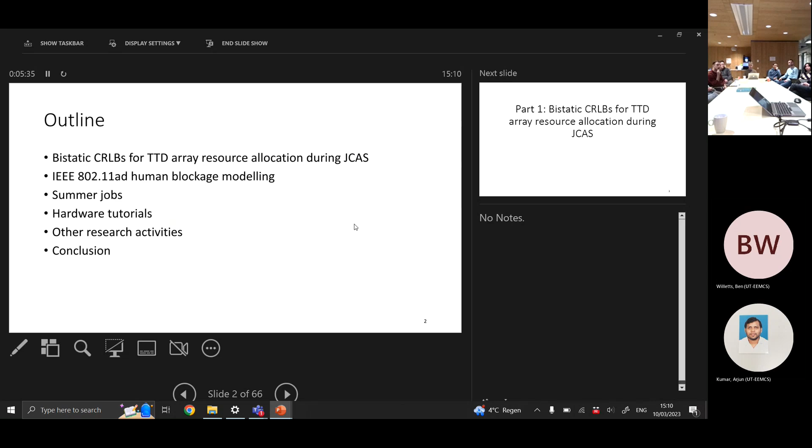So part 1: bistatic Cramér-Rao lower bounds for true time delay array resource allocation. That's a mouthful. For sensing, we say bistatic reflections. For comms people, you're looking at a CSI information matrix, and each signature within that CSI information matrix resulted from a bistatic reflection, other than the line of sight.

So me showing you how well you can estimate the time delay from a bistatic reflection, the phase, and the angle of arrival that is received, is equivalently saying how well can I get this signature, how fine a resolution can I get my signatures in your channel state information matrix. So there's an equivalence there, and I'll try not to make the terminology too radar-heavy, because I know the audience isn't radar-heavy.

So the JCAS problem here: we've got an extremely large number of elements at the access point, so it's base stations here. There's a 16 by 16 MIMO antenna system. And how much power does that system have to give to each of its users for them to get enough CSI information? That's the question.

Now we're going up into millimeter wave, almost in 5G. There's already established bands at around 29 gigahertz, which is almost millimeter wave. You're getting the capability to fit multiple antenna elements on user equipment, on smartphones. I've shown 2 examples of user equipment with antenna arrays, but the vast majority I've seen on IEEE Xplore are typically small multiband patch antennas on the small faces of the smartphone.

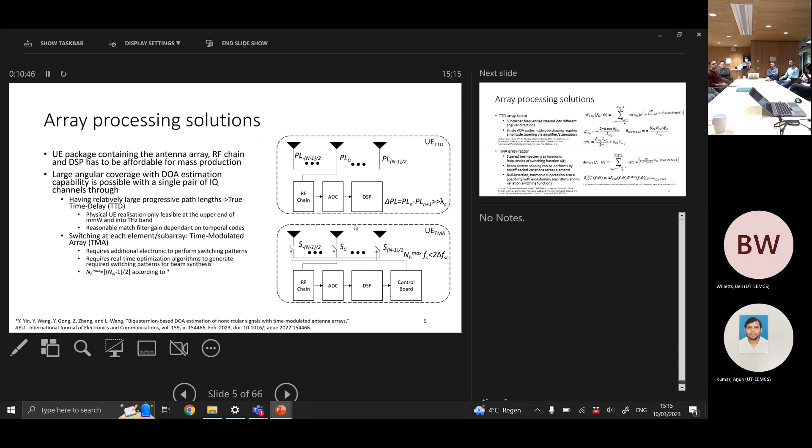So I'll be talking about the true time delay first, which is having large path lengths on the feeds of the antennas. The second part I'll talk about the time modulated array, which has more degrees of freedom, which we'll talk about later. So just a little bit on the maths with the two types of arrays.

Most of you have probably seen this before. You've got the array factor of the array, which is a summation of complex exponentials over the number of elements you have.

The bad thing about the true time delay, which is the delta PL, the path length difference at each element, is that every angle of arrival only intercepts a very small number of subcarrier frequencies.

So every subcarrier frequency will be directed into a different angle in the space domain. If you have a code, which is typical in a lot of comm standards, where the code is spread over frequency rather than bit over in time, you can't get the full gain of matching that code because your frequency is tapering over a small number of frequencies. So you're relying on knowing the code over time rather than frequency.

The other bad thing, which is probably a bit towards Papain's area, is if you're shaping the side lobes, you're relying on using the amplitude at each element of the array. And if you've got a power amplifier that's very efficient in one region, you don't want the same power amplifier working at different power levels because it's very inefficient.

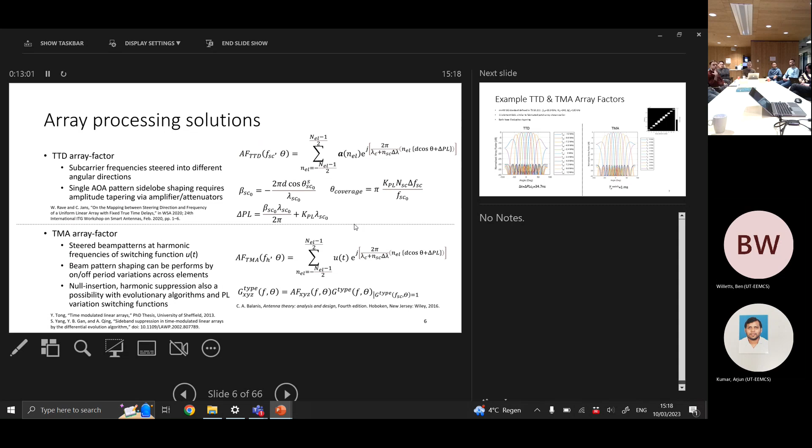Here's an example of the evaluation of these array antenna factor patterns. For the first example, we're looking at 5G, which is almost in the millimeter wave band at 28.8 gigahertz, with 240 subcarriers, 120 kilohertz apart. I used 11 elements for this example because the previous antenna had 12 elements, so I thought I'd show one nearest and keep it odd as the one I've shown before.

As you can see, for the true time delay, which has large path lengths, in the angular domain, the different subcarriers in this standard point at a different angle because you've got a large time delay on the path lengths.

I've purposely said the delta time delay needed. So the change in the time delay along the 11 elements needs to be 35 nanoseconds. That seems very small, but if you put that in propagation distance, it's quite a large distance. So at this frequency, having just a substrate integrated waveguide to give you that time delay is huge.

Once you get to terahertz and millimeter wave, around 300 gigahertz, that becomes very small, but we're not there yet. There's a lot of factors involved in making that mature enough.

But let's go on to the time modulated array. So on the top right there, you've got the number of elements, so 11 elements, and you've got the time in the y-axis. The white boxes tell you how long each element is on. And this switching pattern repeats over one period, with a duration of 1 millisecond. So that 1 millisecond, as you can assume, all those square discontinuous waveforms become sinc patterns.

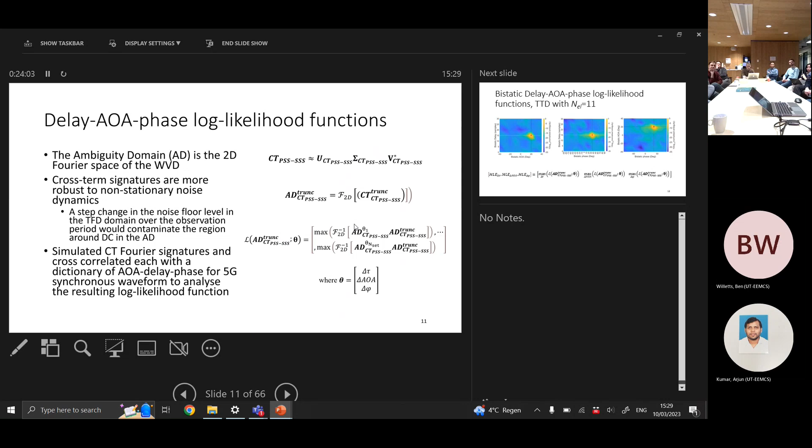Intercept the signal, cross-correlate it with all these different types, versions of this, which have different angular arrival differences, different delay differences, different phase differences between the cross terms, and say which one more likely is the correct phase difference, angular difference, time delay difference. So what's the angular difference between these, the delay, and also the phase that it reaches the receiver?

And I get these patterns. So it's trivariate, there's 3 parameters: the bistatic angle, which I've made frequency with this arrays that I'm using, the delay, and also the phase.

So if this is the results of my dictionary of all the different types of these cross-correlated with an intercepted signal, it says this is your likelihood function. So the maximum likelihood is the largest likelihood.

So these lines here, this simulated noisy signal is at 20 degrees separation with line of sight, with a delay of 15 samples in 5G samples, and a phase of plus 35 degrees. So the maximum likelihood is dead on with what it actually is.

Now the next thing is, if you've got a complicated scenario, say your channel state information has many signatures in it, the rule of thumb is: the quicker this falls off, the larger the gradient — if you've got many of these signatures that you've intercepted, the more narrow they are, the more information there is. If they're all wide and they're all superimposed, it's difficult to get information from them.

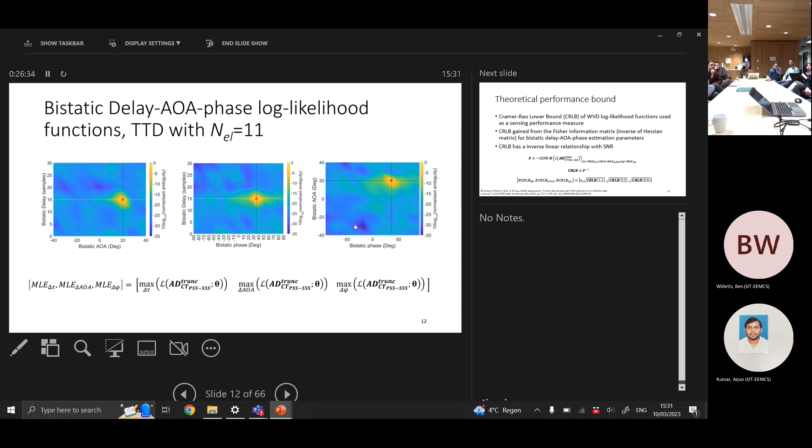So the larger the derivative, the smaller the resolution. So it's an inverse — the Cramér-Rao lower bound is the inverse of this Fisher information matrix, and importantly, it's got SNR. I'd refer you to Greco's papers or Harry Van Trees, who recently died actually, his books for all the actual fundamentals of how these are. Harry Van Trees' book is very good, and this paper is very good.

So we now have SNR as a function of variance. Actually, the Cramér-Rao lower bound is a variance estimator, but root Cramér-Rao, if it's a square root, so it's a standard deviation.

So now we're interested in the number of elements the UE possesses, the number of elements in the phone array, and the fractional power supplied by the transmitter. In simple terms, more elements, more power allocated, the lower the variance is.

So this SNR is now on a denominator, so if the SNR goes up, the variance or the standard deviation here goes down, as you'd expect intuitively. And this is just the line of sight SNR and the non-line of sight SNR.

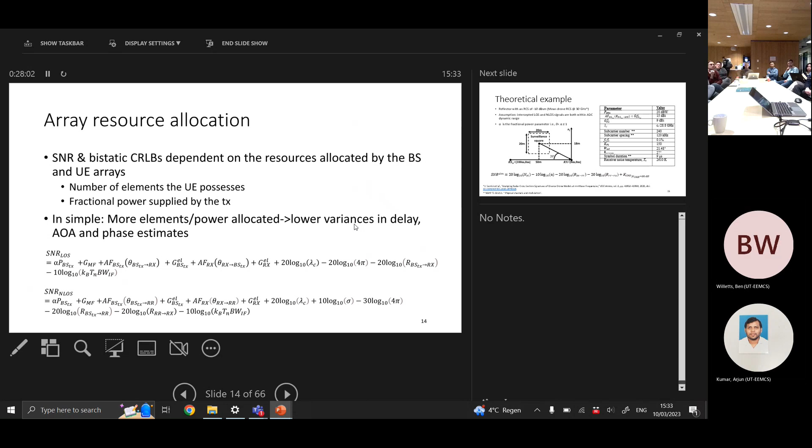And we're interested in this alpha. So how much power — alpha times power, and alpha's between 0 and 1 — how much alpha do we need for an acceptable performance? And obviously the number of elements is in the array factor, so the more coherent elements, the higher the array factor is. These are just the two.

So let's just look at a simple scenario. 5G, as I just said, the 28.8 gigahertz band. Let's just say we're looking for a drone in a region of space. I took a value of a drone to be minus 10 dB square meters at 30 gigahertz from this reference.

We're assuming we're intercepting the line of sight and non-line of sight. So the line of sight is going to the receiver, and the non-line of sight is going off the drone and going to the receiver. So it's the same bistatic triangle.

These are all from the 5G standard, the subcarrier numbers and spacings. The power of the base station, 20 dBW, is just from a typical base station.

So we're just looking at what estimation capability in range, angle, and phase, because if you want to get Doppler, you're looking at phase over time. So phase, angle, and delay - do you get when you give the base station a certain amount of power, alpha times the maximum power you can have, between 0 and 1, and you give the receiver a certain number of elements.

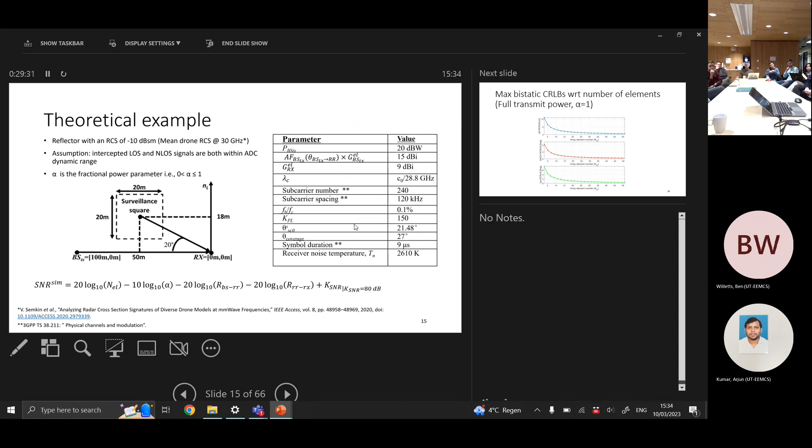When you put all these together, it simplifies into this SNR equation in terms of number of elements, alpha, the range from the base station to the reflector, the range from the reflector to the receiver, and this constant. So all of this is absorbed into this final constant, basically just to simplify.

But I said we're also interested in the amount of power the base station transmits in the direction of the receiver. So it's a bivariate problem: number of elements, and the amount of power the base station gives.

Easy enough - many people, when you've got multivariate problems, and this is just a bivariate problem, you can use the L1 norm or L2 norm to simplify, which is just the absolute sum of a vector to have one parameter which includes many dimensions. I assume at least some of you are familiar with the L1 norm.

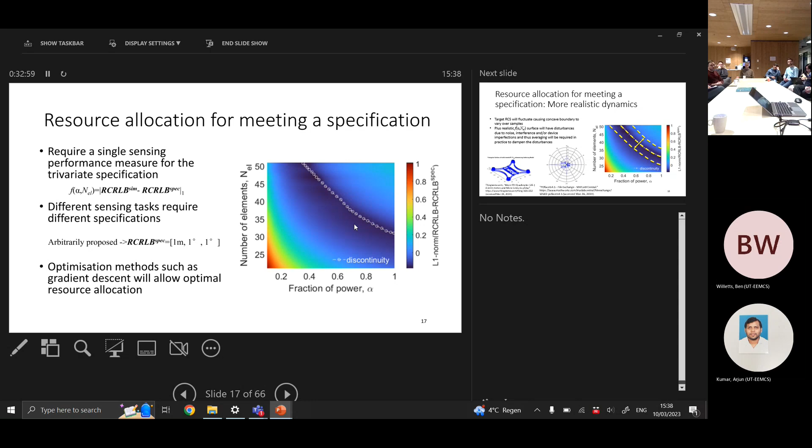In practice, as I said, drone - just a simple simulation. Here's reflectivity or RCS in angle. I use the mean value, so the mean RCS of this drone at all angles is the solution boundary. But if it's larger than the mean, you need less elements, less resources. If it's smaller than the mean, you need more resources. So in actual fact, it's going to be a moving boundary depending on the angle you're looking at the target.

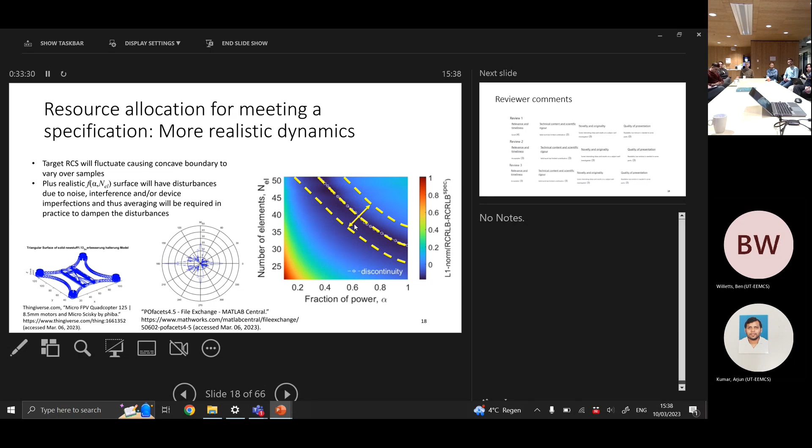So next part - I've got over that now. So we're looking at millimeter wave now, still looking at arrays, portable arrays. Now we're looking at Wi-Fi, 60 gigahertz, double the frequency, half the wavelength. We're looking at the blockage, the effect of blockages.

I've been working on this the past 4 months. Why do they have this frequency, this standard? It's been sold commercially, you can buy it now online. Large data rates, high quality video streaming with no wires, VR headsets, modern gaming requirements. Is it millimeter wave to the rescue? 60 gigahertz carrier frequency, the bandwidth is about 1.76 gigahertz.

Problem is, you have high attenuation at mobile objects, people. So anywhere where the boresight of a non-line of sight or line of sight comms link crosses a person, you're going to get a huge loss. People usually move around, especially in commute areas, so you've got a dynamic target that can cause huge losses - a big problem.

So now, as I've called it here, conic billiards. It's a game, just a simplification. If the main lobe is dominating the side lobes, you can simplify it to like a cone function intercepting. You're basically playing billiards and trying to get the reflection to the user. Basically, that's the game - you're trying to get the optimum reflection that isn't blocked by any person, and it gets to the user.

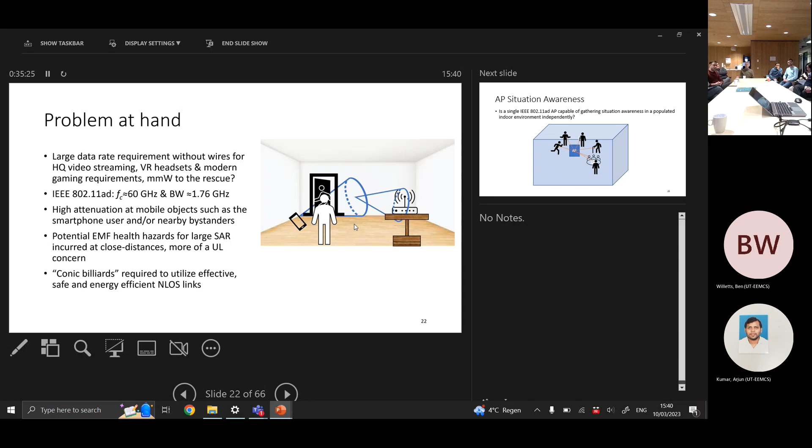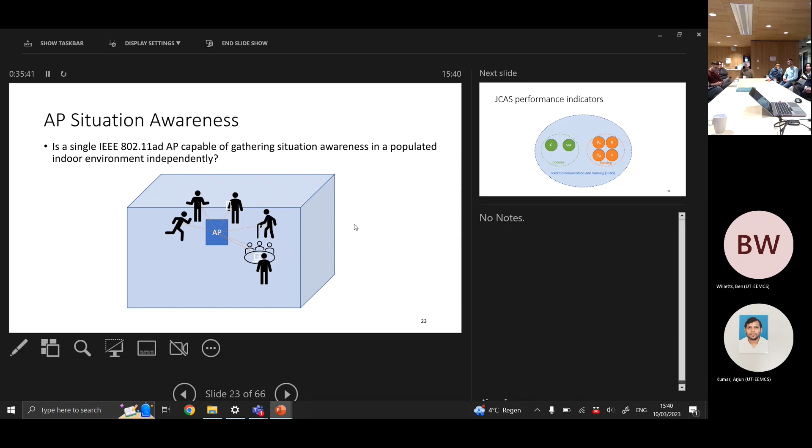So can an AP do all that itself? Can it centralize processing, can it do everything itself? Can it look at all these people moving around and deal with the whole situation? So JCAS - if an AP is going to do that, it needs to actually perform communications. So the channel capacity and the symbol error rate is important, but it also needs to detect things and have a good range and velocity estimates and a low false alarm, because it doesn't want to process every time the noise has gone up suddenly.

So what log normal actually means is that the values being seen at different samples change on a logarithmic scale, and that's typical when shadowing dominates, when there's a mixture of specular and diffuse scattering - when basically the values are changing a huge amount, even though to us it's the same, we see a person, oh there's a person, they've turned around, it's the same person. So this 60 gigahertz frequency, the thing perceived by this radar changes on a huge value - so the statistics are log normal for the person, for the RCS here.

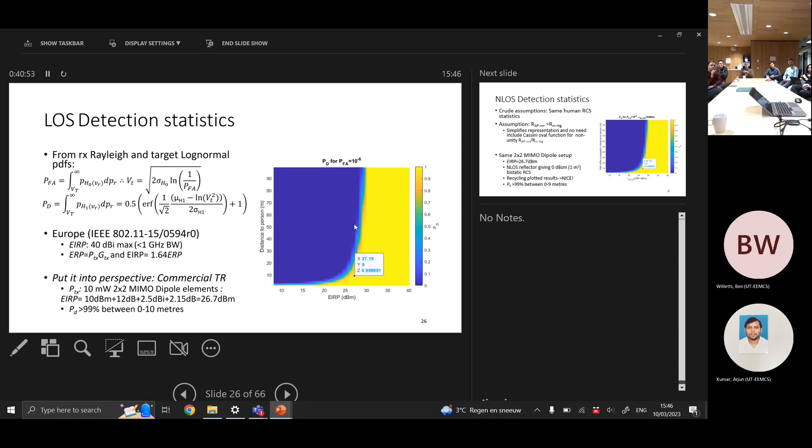So if you look at this plot, for a 4 dipole MIMO system, which is typical, the probability of detecting a person with 99% chance only extends to 9 meters or less. If a person goes above 9 meters, you're getting a lower probability of detection than is acceptable - and people go above that easily. So it shows the distance you can detect with 99% accuracy is quite small.

Now, non-line of sight - we're going to talk about this briefly. With non-line of sight, you're transmitting the signal, it's going off a reflector, and you're making a comms link not directly to the person, but using your environment to have a non-line of sight connection.

So I can use the same plot, being lazy. If I assume the radiated power is the same and the reflector has an RCS of 0 dB, or 1 in linear terms, it's the same 9 meter distance that you can detect the person with 99% accuracy.

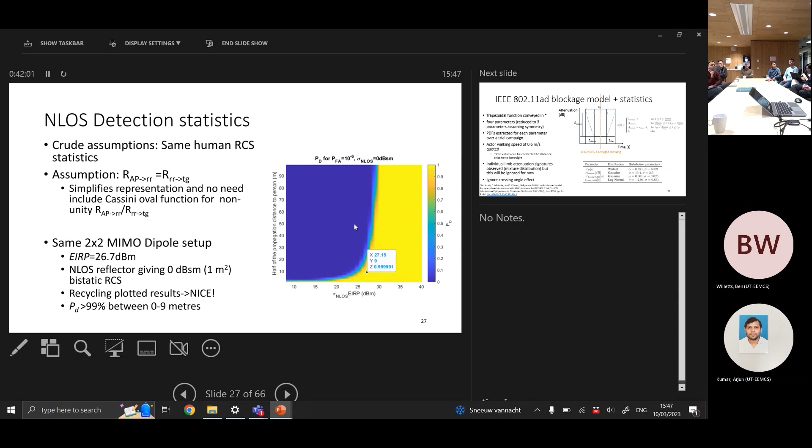But obviously with non-line of sight, you've got two distances - the distance to the reflector, then the distance between the reflector and where you're getting the comms link. To keep it simple, everything I show from now on assumes the distance between the router or AP and the reflector, and the reflector and the user, is the same. Otherwise you have added geometry involving things like Cassini oval functions - if you don't know what that is, you can look it up yourself.

Thankfully, that group showed the reflectivity of a person at 60 gigahertz using this standard. And another group in Germany has done measurement trials of blockages - they did a large amount of trials and have seen quite a small variance.

So think of this as the boresight of the antenna, and you've got a line of sight link with a person - a comms link - and another person walks across. This line is when it's directly blocking the line of sight, so you get a maximum attenuation. But if you're familiar with Fresnel zones, once it goes a certain distance away from complete direct blocking, you begin to have a linear rise again. So as the person starts walking across the beam, you get a linear reduction, a flat attenuation, then a rise again when it leaves the beam. I won't talk about Fresnel zones in detail, but it's heavily related to them.

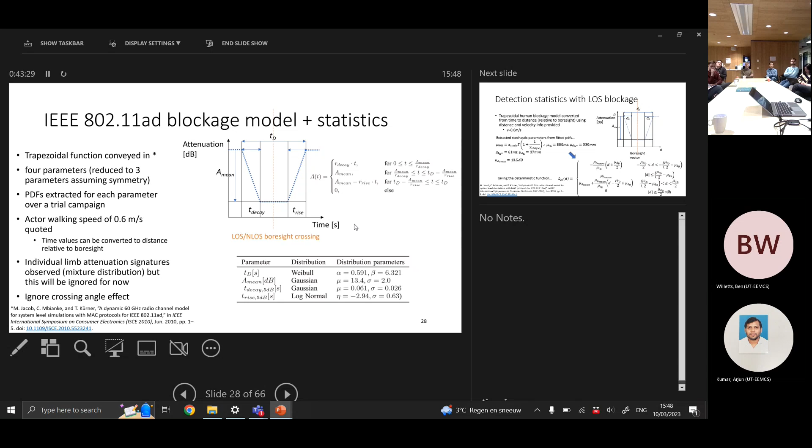So they got all the parameters, statistical PDFs - which are usually statistical unless you're talking about the document format. They got these parameters, the time between the starting to fall and the end of the rise, and fitted that to a probability distribution function. They fitted this mean attenuation to a PDF, and also the decay and rise, but we'll assume it's a symmetrical function for now. So I got all the parameters off their research - the times between seeing the fall in the signal, the maximum attenuation, and then the rise again.

Because they give velocity, they try to keep the person having a constant velocity, you can convert all these times to distances. So I converted all these trapezoidal functions into distances, so you've got attenuation over distance relative to the bore site of the antenna. So all the statistical investigations or information they've gained, I've just converted into a deterministic trapezoid function, as you see, with all the mean values. I don't care if it's a Weibull PDF, I just convert it to a mean, and that's what I'll use.

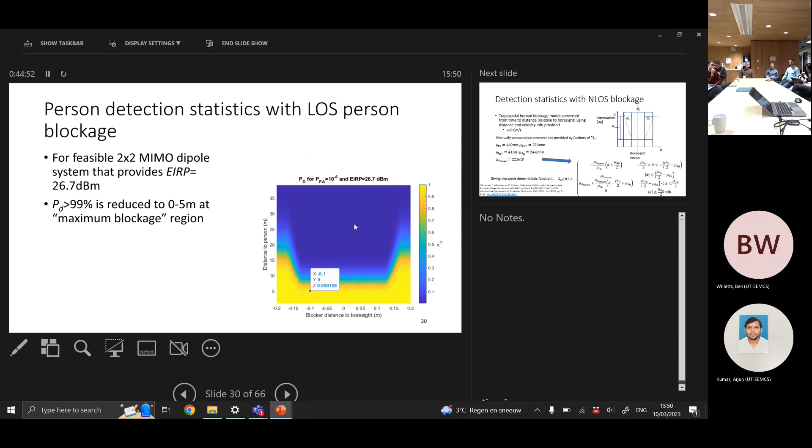So we plot this loss parameter in the SNR, use these 2x2 dipoles, and to get a 99% probability of detection, it's up to 5 meters. So before it was up to 9 meters, but when a person's standing in front of a user, if the user is further than 5 meters, you're not going to be able to detect them. I think I'm talking nonsense, actually - it's basically saying if a person is above 5 meters, you won't be able to get a good detection of them. That's what it's basically saying.

They also supply the non-line of sight case: sending the signal out, someone's blocking, it hits off a reflector, then it goes to the user. So it's not line of sight, blocker, user - it's router, blocker, reflector, user. So non-line of sight blocker - completely different things going on there.

As you can tell, before the mean attenuation was 13 dB having a blocker to the user directly. But when you want the signal to be coherent with a blocker so the energy goes to the user, the effect is greater having someone in between that initial reflection, because then things aren't coherent on the reflector, and it's a poor radiator into the direction. It's 10 dB more attenuation.

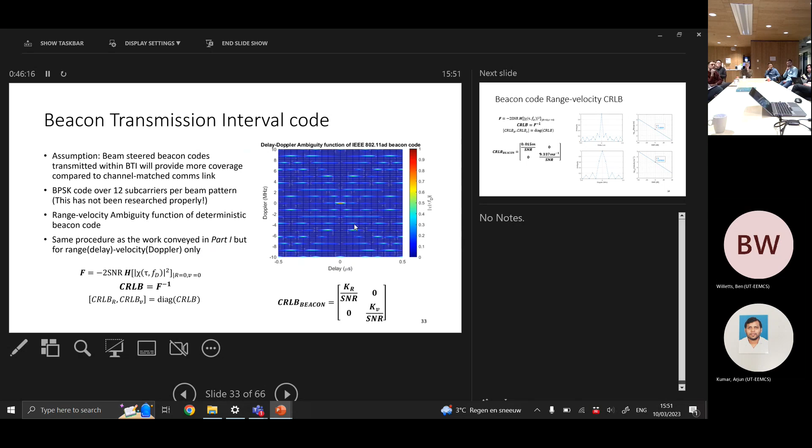I've talked about Cramer-Rao lower bounds before. So we're interested in JCAS capabilities of this AP that's centralized, trying to figure everything out - where people are, stop blockages. So the beacon signal for this standard was over 12 subcarriers, which was quite small. And from that theory I've just shown, the Fisher information matrix inversion, and look at the velocity and range variances now - so the variances in range estimate and velocity estimate.

Doing this theory all again, I found this matrix gives - at an SNR of 0 dB, or 1 in linear terms, you get a range variance of 15 millimeters. And at the SNR equal to 1, you get a velocity variance of around 10 meters per second, which is quite large. But to get velocity, you get a number of phase measurements first and do the FFT, so it's not a surprise it has a larger variance.

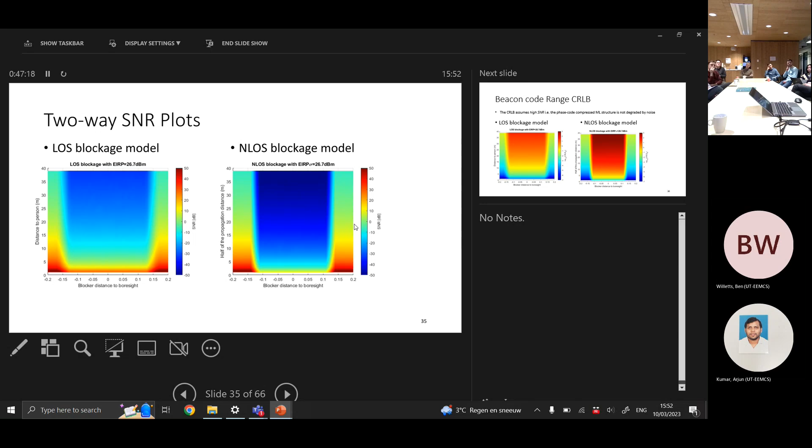So I put those trapezoidal functions I just did, and then put the SNR in. We're looking at sensing now, so it's two-way - you want to look at your target, and it has to reflect back, so it goes to the target and back. So these are the two-way SNRs, and you can see it drops off significantly from 10 dB to minus 20 dB because of the presence of the blocker. The blocker has even more of an effect when it's non-line of sight comms compared to line of sight comms.

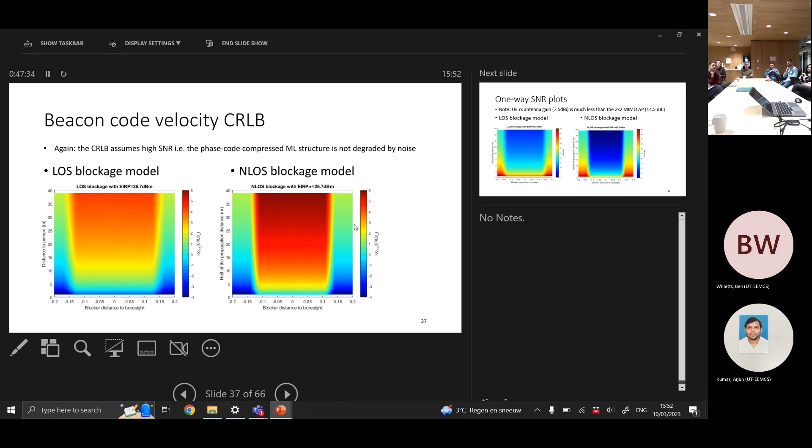I plot these SNRs, basically put these into these equations, so you have a similar sort of effect on the variance of range to estimate range, similar to estimate velocity. For comms, it's one-way - it's a one-way system, you don't have to think about coming back, you just want to get the data to the user. So these are the one-way SNRs.

Don't be alarmed - well, you're not going to be alarmed - the SNRs are similar, really, for one-way and two-way. The reason is the user equipment has a small receiver gain. It's only a small smartphone with small patch antennas - a receive gain of 7.5 dBi for a patch is normal.

The router had a receive gain of 14 dBi, so that's why they're not as different as you would expect them to be, one-way and two-way.

And I'm talking comms now, so we're interested in the symbol error rates. 16 QAM, as you'd expect for QAM compared to BPSK and QPSK, is hugely sensitive on the SNR because this drops off quite quickly, this complementary error function. So this blockage has a huge effect on 16 QAM being able to decode it in comms.

You're going from minus 50 probability of log 10 minus 50 in the log to around 1 due to the blockage effect for 16 QAM, and it's even more of an effect on the non-line of sight blockage model.

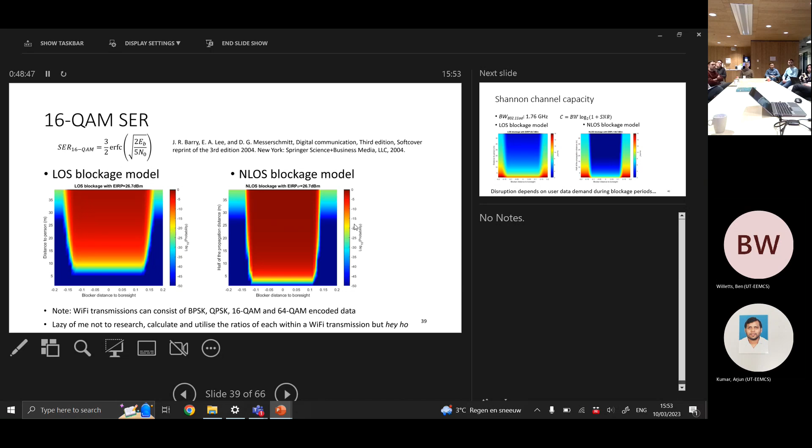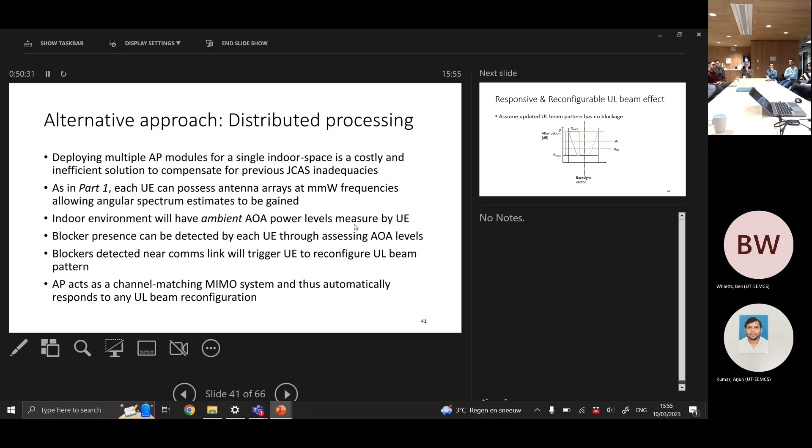Because all the router's doing is channel matching, it's channel matching what it receives. So if the UE has an array and it can look and see if the blocker is going to cause a disruption, it changes its uplink beam pattern. And all the router's going to do is channel match to the uplink. So the UE is the master in this situation, and the router's the slave, because it's just channel matching to what the UE decides to send its uplink transmission to.

So equivalent to blockage starting to happen: the UE says there's a block. The UE detects a blockage, it changes its beam pattern to another direction, so the attenuation goes to 0.

So the T react is the response time. The shorter the response time, the smaller the average of the attenuation.

So instead of just letting the blocker do its whole time and disrupt the communications and sensing, it will start to disrupt, the UE will change its uplink pattern at a certain time, and then it will choose a link which has no attenuation. So you're looking at the change in the average of this effect.

And these are just surfaces of response time over the sensing or comms parameter. In this case, it's the range variance. So the quicker you respond, the smaller the average range variance is. This is more of an impact for the non-line of sight case because the blocking is more disruptive. So the sooner the response time, when the blockage starts happening at 0, to bring it back to 0 attenuation, the smaller the variance in range.

Smaller the variance of velocity, same thing. This has got a huge drop off, so you need to respond quickly. If you don't respond in this initial falling period, there's not a huge gain. So you need to respond. The UE needs to change its pattern before it gets to this period where there's not much of a gain. So it needs to be quick.

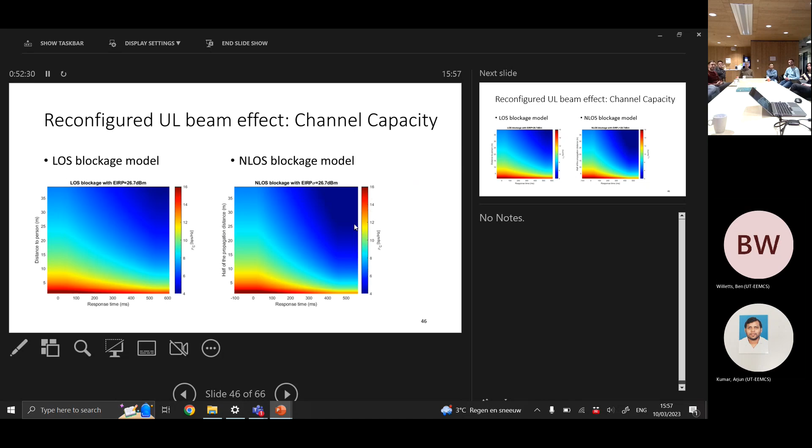To be very quick, so this is going to be rapid now.

So talk about true time modulated arrays, having switches on each of the elements and deciding when they're on or off. You can do, it's not just on and off, there's people that have done different phases. There's a huge amount of capability you can do with this pattern.

Essentially, with windows, the Chebyshev window, if you're familiar with spectrum windows, it's flat and it falls off in the spectrum. For this time modulated array, it converts this to time durations. So the middle element has a large time duration, and these reductions in time durations are equivalent to the falling off of a spectrum window that you're familiar with. That's what it coincides with.

And that causes a main lobe pattern to side lobe, all side lobe patterns to be minus 30 different dB difference, this windowing, ideally.

So that it just simplifies the propagation. We don't have to worry about, if you've got an isotropic pattern, you have to think about spherical modes, or if you've got high side lobes, you have to think about where do these side lobes go, what links are they creating. But for this windowing, you only have to worry about the main lobe, you have to follow the one main lobe and see where it goes, basically.

It simplifies it. For these cones, each main lobe is like a cone or a spherical sector. When they intercept, forget all the furniture, think about ceiling, floor, walls. There's three possibilities. The main lobe, the cone, intercepts one plane, either a ceiling, a wall, or a floor, and that's going to be an ellipse. If you're familiar with conic sections of a plane intercepting a cone, it's an ellipse. So if it intercepts one plane, it's an elliptic radiator.

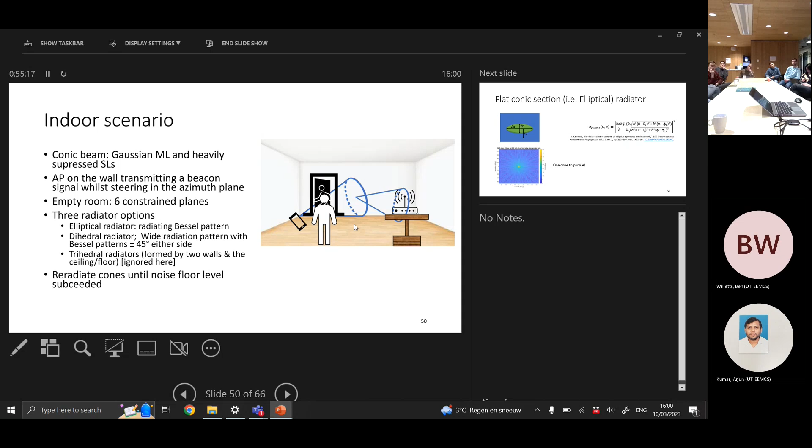And we follow the cones. So each radiator creates another main lobe. You follow it until it goes below the noise floor, because the receiver can't detect it anyway, so we've gone well over. So if the router, the transmitter, or the UE intercepts just one plane, a ceiling or a wall...

and you get an ellipse because it's a cone, you get a Bessel function. If you're familiar with integrating polar coordinates, these Bessel functions of the first kind always come along in polar or cylindrical integrals. So the radiation pattern for this is going to be an asymmetrical ellipse, depending on the radius of the ellipse. Similarly, most of the energy is within one small region, so you only have to follow one cone again, because it's all within a small number of angles.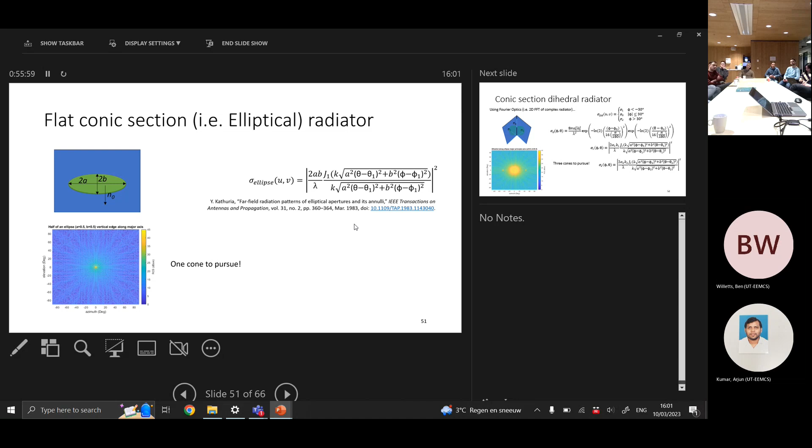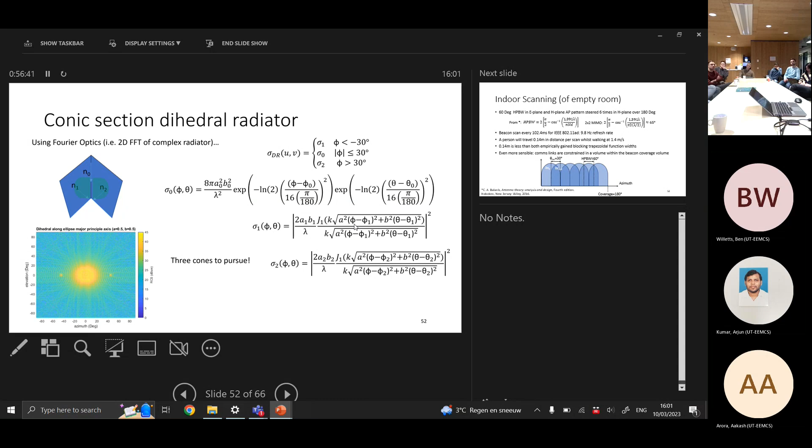There's no distributed difference. If the beam pattern intercepts a corner of two planes, it's an ellipse, but you've got multi-bounce in the middle, so that's going to be a wide scattering, high scattering. But then when the phases align at the planar wave, you've also got the same Bessel functions. When the flat part's 30 degrees away, you've got three lobes: one when you're flat on with this wall, one when you're flat on with this wall, and one when you're near where there's multiple scattering.

So indoor scanning for this standard, it's going to be funny. So when I show you this blank slide in a minute, I'm just leading you onto it.

Anyway, for this scanning, all these cones are being scanned in azimuth by a router. There's a thing called the beacon transmission interval, so a router will train itself where it is by scanning the room with this beacon to see where the room is, and all sorts of sophisticated stuff. So basically, what I was planning to do in the next two weeks is to look at these, when you follow these cones around this environment, an empty room, what does the power levels look like?

Follow the cones again, put a person walking in the room, follow the cones again, what do the power levels look like? So it's another decision problem. You follow the cones, the radiation patterns around the room with no blocker, you get a Rician.

So you've got the noise, which is the receiver noise, which is Rayleigh, and most of you know Rayleigh plus constant is a Rician. Depending on the amount the constant is compared to the variance of the Rayleigh, these are all different Rician functions, but it depends on how dominating that constant is to the variance of the Rayleigh. Fundamental stuff there.

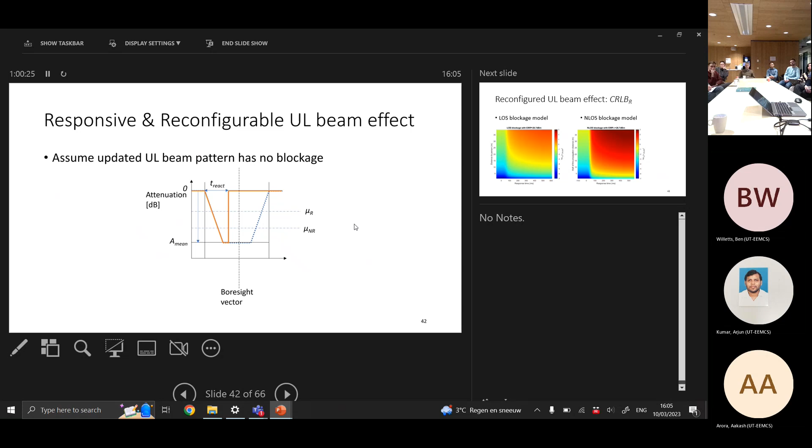And all this is to find this function. I know if you respond in this time, this is the result now, but I don't know what the time is yet. I need to know this. I need to solve this problem to know what the time can be. But that's a simple way of looking at it.

You also need to know your clock frequencies of your UE processor. There's lots of other things you should know as well. But fundamentally, you need to know when can a UE know there's a blocker, and this is the statistics that are going to allow it to know that time, the response time. The UE can then change to a different pattern and reduce the effect of a blocker.

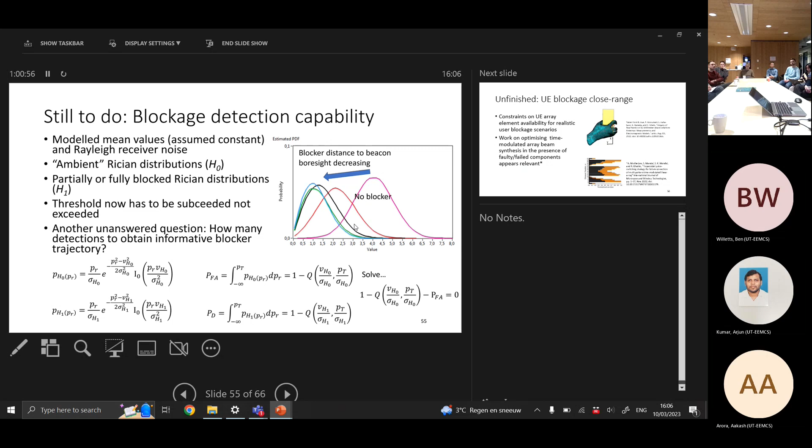I've gone well over, okay. Unfinished work, and I know Yang said this from quite a while ago, and Yang hinted at this, that some of this should be the forefront of the research, but I haven't tackled it. I've led towards it, but I haven't tackled it completely.

It's the effect of reflected signals, because the router can be in a place where it's hard to get within a small distance, it's hard. You have to climb on a ladder or something to disrupt the UE to get too close at high power levels. But in a UE, you've got it in your hand. These array elements, it's easy to block them.

So there's some good work from a group in India with the time modulated array. These are the periods that each element is switched on. They've been able to show that they can create all these different beam patterns when certain elements are faulty. So here, elements 31, 23, these are all deemed faulty in manufacture. I don't know how, but they've still been able to create beam patterns.

But you just change the terminology for this. Instead of faulty, you just say they're blocked by the hand. So in this picture, these elements where the fingers are on, you can't turn on at all. You only can turn on the elements that are not being covered. Then you do your optimization, whatever optimization technique, to get to a reasonable beam pattern to get your comms link to the router from the user equipment with only a limited number of elements.

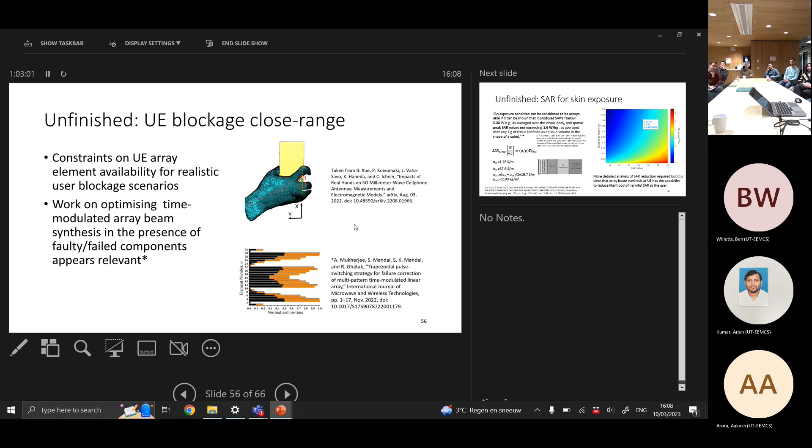And you've got the dangerous SAR. So yeah, is there any point doing this? Summer jobs, Part 1, I did a document that had simple EM theory to help with this.

Basically replicating the EM boundaries of a person with clothing, skin, with material which the students have built in the lab, which you've probably seen. Water had such an impact on moist skin compared to dry skin at these frequencies, so I used fake leather, bought some water-based cleaner, and covered it with that to try and replicate the effect.

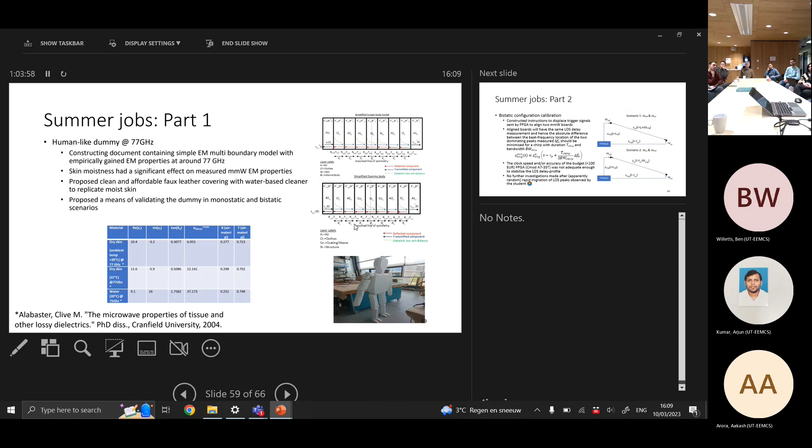I also helped with some measurements in KU Leuven, in collaboration with TUE - Eindhoven. But I didn't do the dirty work, the hard work - Kai and other people were there for the full week.

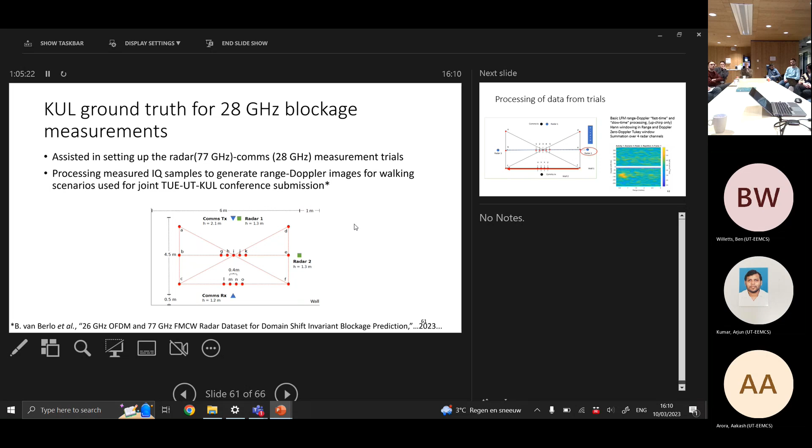They had people walk at constant velocity, the same point as the work I showed before, so you can convert the times to distance. They were doing certain walking trajectories and measuring with the radar and the comms system at 28 gigahertz. The leading author, Bram van Berlo, got a paper out of it, and I was able to contribute, I think, 3 range Doppler results in his paper, which was good to see.

What Bram was interested in, which is where all the clever work comes into it, he wants to get the PDFs. So when a person is walking anywhere in a room, despite the effects of multipath with different parts of the room, he can still extract the fundamental statistics from the person itself. When a person's walking around and the radar's illuminating, sometimes if your arm's up, this becomes a corner reflector. If there's a strong reflector in that part of the room, like the TV, it's going to be a strong reflection. But if you walk to a different part of the room, you don't get that strong reflection. He wants to extract the statistics caused by the target alone and not the multipath surrounding it, which is very complicated.

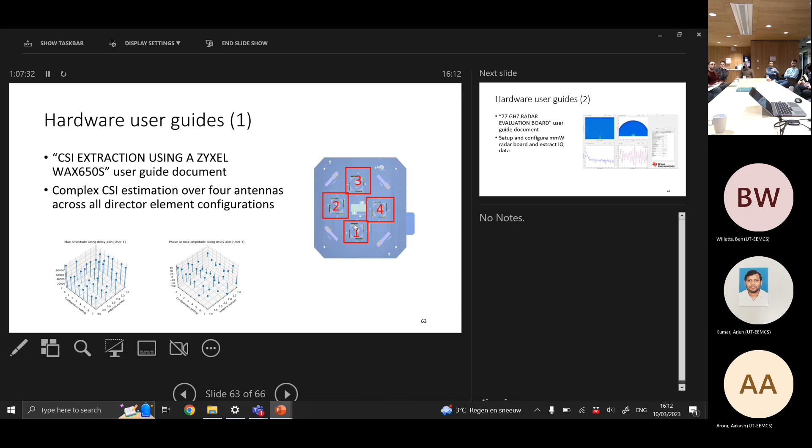I also helped with hardware user guides. We had a presentation by a guy who was working at Adant, and they gave us a router with 4 antennas that you can steer 45 degrees. So I was able to create a document that showed the complex response on my office where I am now, over all the antennas and all of the scanning configurations. If you go to different parts of a room, this complex channel response will change, so that'll be interesting for the students to use. I also did a hardware user guide for the 77 gigahertz radar.

Non-technical activities, I helped with some proposal writing. I found out how dense and time-consuming those proposals can be, especially when competing with other people in these EU proposals. You need a lot of people from different countries, a lot of collaboration, and getting them to respond in time is quite a tall order, as we say in English. So I got to see that point of view whilst I was here as well.

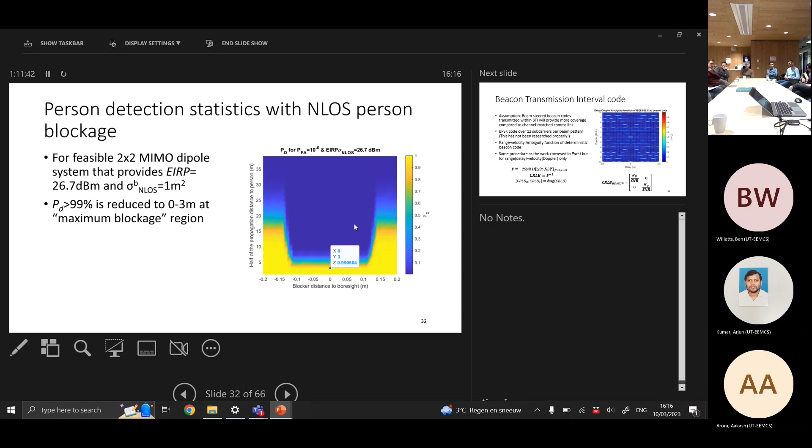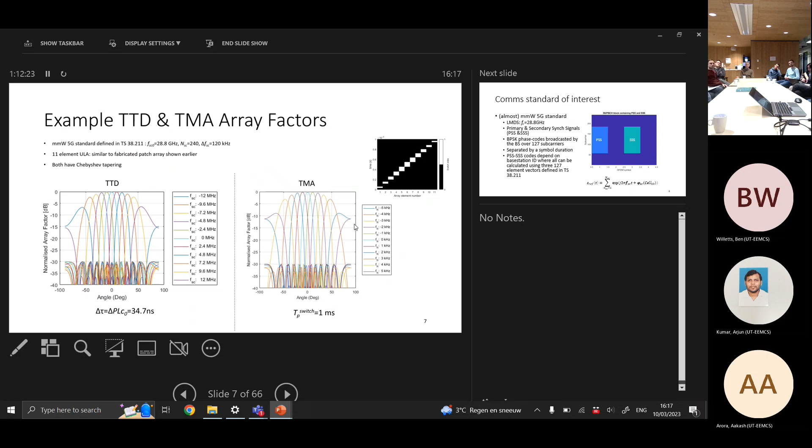So that 5G synchronization code wouldn't work for true time delay arrays, because the symbol isn't coded in time - the coded symbols are in frequency. But in a true time delay array, you're only receiving one frequency for one angle, you're only receiving one symbol, you can't do code compression. You understand what I mean? Whereas with the time modulated array, all of the subcarriers are at the harmonics, so you can compress the code over in frequency. There's lots of stuff.

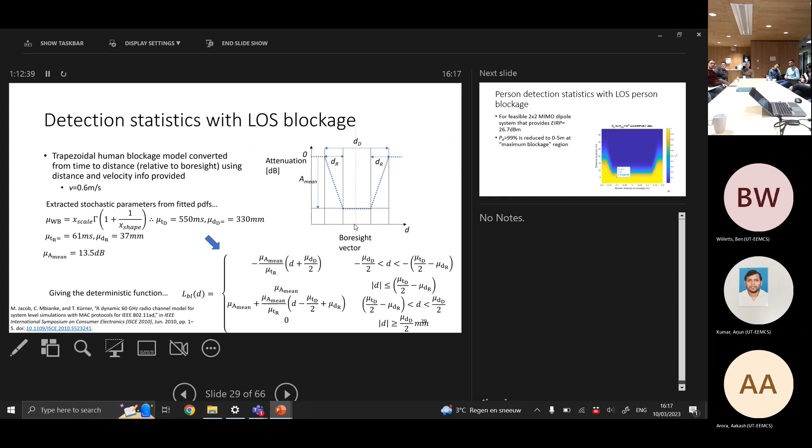I'll point you to this if you're interested in array stuff - array beam synthesis, nulling, time modulated array. The guy, Shiwen Yang in Chengdu province, has recently become a fellow in the IEEE actually. I can find it for you.

I don't think I put them in, but there's a guy Shiwen Yang in China who's done a lot of work on this.

And probably with our case, there's people that use evolutionary optimization algorithms. There's many of them now, like Firefly, whale optimization, grey wolf. There's loads of animal labels because that's probably where they're derived from, but they use these optimization problems to develop these.

So you give a specification like, I want the beam pattern to be within this upper threshold and this lower threshold. Let the optimization converge through one of these algorithms, and it'll give you this pattern. And there's a whole area with harmonics - if you've got multiple phases on the on state, you can suppress certain harmonics.